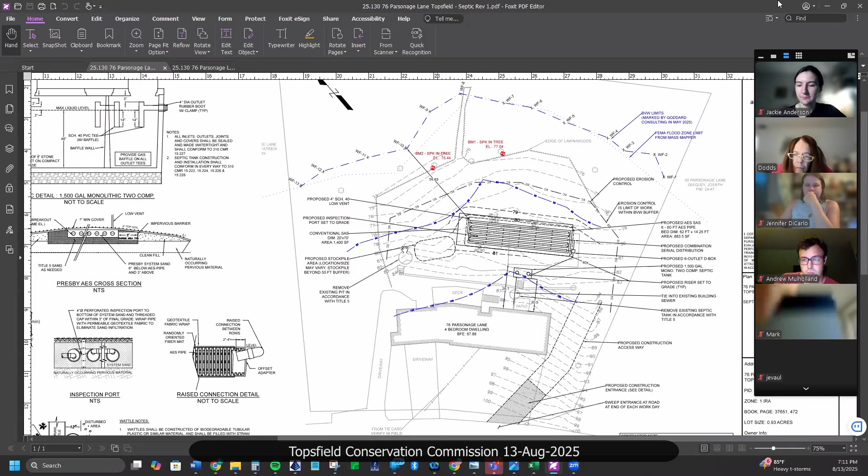All the disturbance happening within the resource area is beyond the 50-foot buffer, with very slight grading touching the 50-foot buffer. But again, it's all within established lawn, and it will be reseeded after the site is stabilized, back to the lawn that gets ripped up from replacing the septic system. We're proposing a construction entrance coming in from the side lot. It's kind of steep terrain coming down here, and we'll have erosion control set around roughly the 45 to 50-foot buffer. Other than that, it's a fairly straightforward septic replacement, happy to take any questions.

Sure, I'm seeing a proposed stockpile area. I remember hearing often that we don't allow stockpiling, but I just noticed that. Yep, so that's just when they're digging up, they have to excavate the soil out, taking out the A and B layers. They have to put the soil somewhere while they put the pipes in for the septic system, so it's a very short-term stockpile. It's not like a true stockpile that sits there for days with vegetation growing.

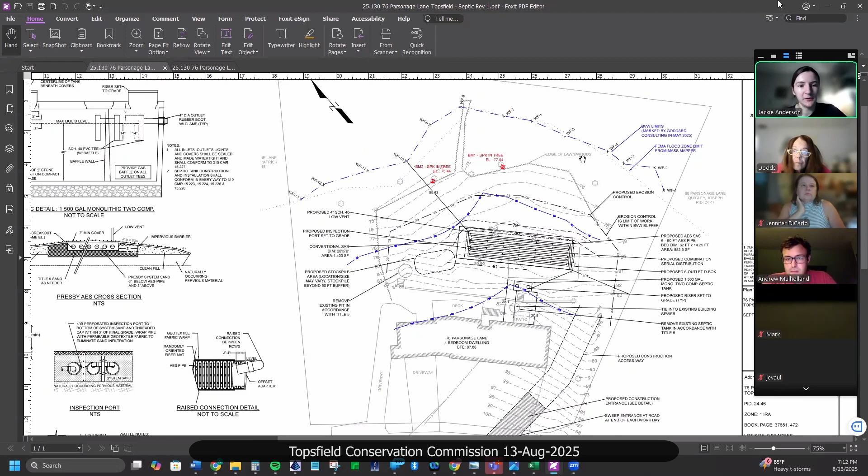Anyone else? I'll also note this plan was recently revised just to correct the numbering of the flags and the drawing of the buffer zone line. I'm comfortable with the way those have been revised. I did review the wetland line and I have no issues with it. I think that's all I had to say about this one.

Just to Andrew's point, oh my God, this lightning is crazy. Just thunder rather. Just to Andrew's... Jen, we lost you.

Jen? Can you hear me? Yeah, now we can. Lost you for a second there. Oh, sorry about that. I think it's this weather affecting my connection. I'm going to turn off my video just to conserve resources.

My point was that in the order of conditions, perhaps we can indicate, to Andrew's point, that the stockpile is temporary and solely for the purpose of the replacement or installation of the new system, and will obviously be removed after.

Sure, I like that. Could you hear that? Okay, that's fine. All right, anything else, anyone? All set with me. All right, I suggest a motion to close the hearing.

I'll put forward a motion to close the hearing with respect to NOI 307-0859 for 76 Parsonage Lane.

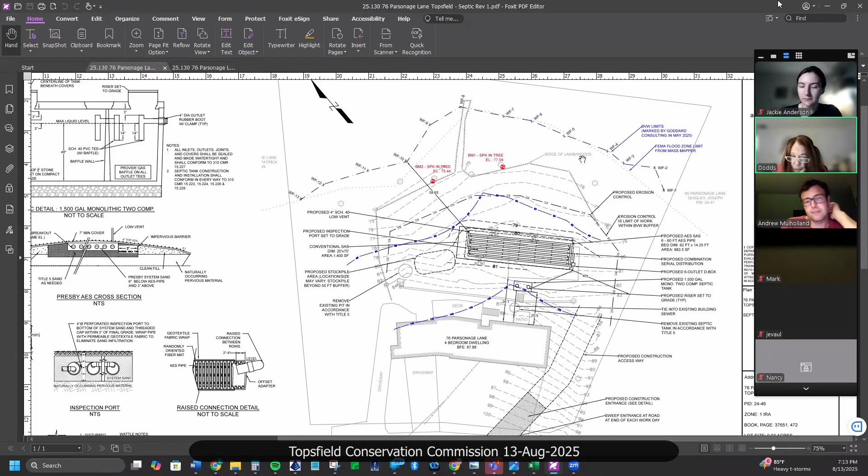This is Jen, I'll second that motion. Okay, and how do we vote? Dodds Shamrock, aye. Jen DiCarlo, aye. Andrew Mulholland, aye. Maureen, thumbs up or down, as Andrew says.

I don't see her at all. I think recently. I see her but I'm not hearing anything. Maybe if you can see her. Okay, I can see a thumbs up from Maureen. Okay, good. All right.

And then we needed a motion to issue orders of conditions. I can put forward a motion to issue an order of conditions for MA DEP file 307-0859 for 76 Parsonage Lane, map 24, lot 46, under the act and the bylaw for the work as proposed and shown on the revised plan dated 8/8/25, with the usual and special conditions, and that it be noted that the proposed stockpiling location is temporary and to be removed as soon as possible, once the backfilling has happened.

This is Jen DiCarlo, I'll second that motion. And how do we all vote? Dodds Shamrock, aye. Jen DiCarlo, aye. Andrew Mulholland, aye. I see a thumbs up from Maureen. Good. Okay, wait a minute, that was the one for order of conditions, right? So we're all set with that? All set. Great.

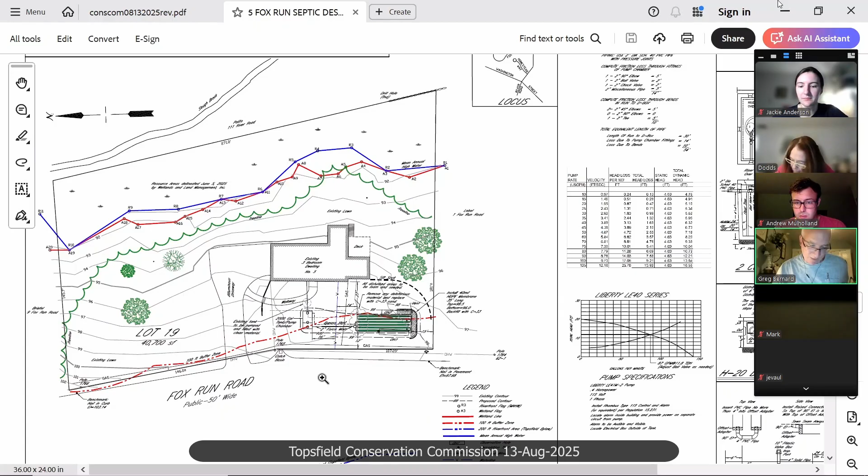He currently has a 3-bedroom dwelling. Streets down at the bottom of the page, and he has a failed septic system which is located in the front yard.

The resource areas were flagged in June. In the rear, off of the property, is Slough Brook. Slough Brook is recognized as a river in the local Topsfield bylaw, but it is not recognized as a river by the state, and it is not recognized by using stream stats.

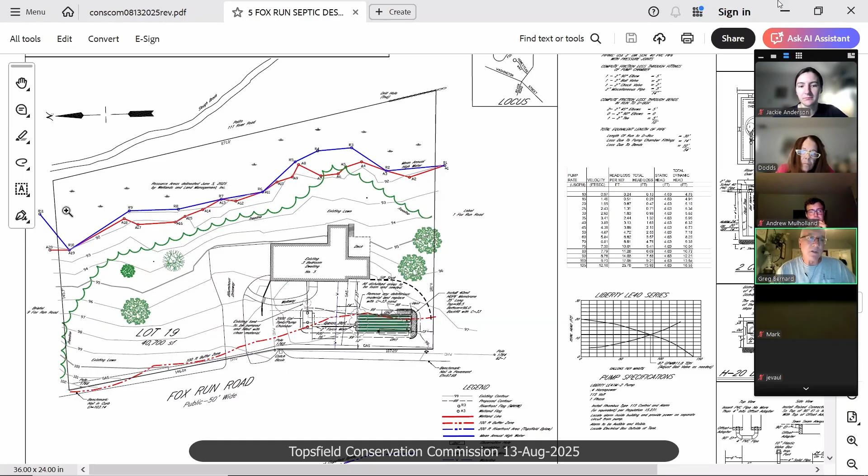Even though this is about the bank of Slough Brook, the mean annual high water is shown in blue. So it extends here. It's pretty wet. They delineated it the beginning of June.

And the BVW is shown in red. In some areas, it's very close to the mean annual high water. It is mostly in the woods or tall shrubs.

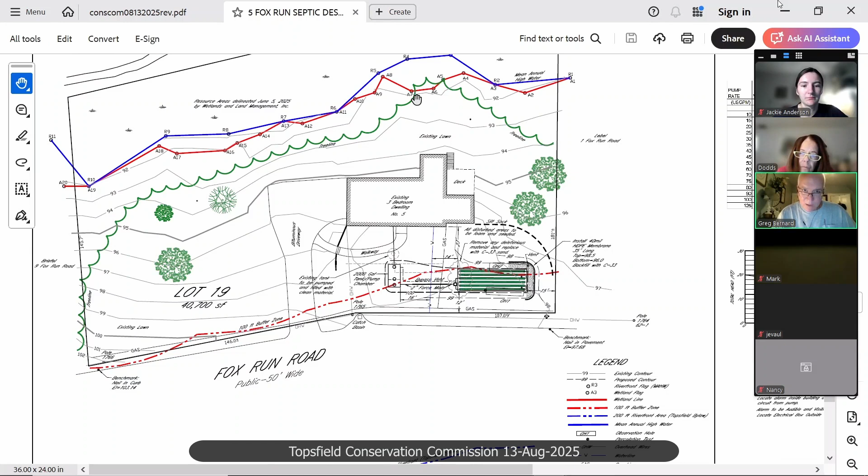The edge of lawn follows this tree line right here. So this is all lawn area with a couple of individual trees. There is a wetland flag that comes out into the lawn, just a small portion right in here, and then the rest is lawn up to here.

We've moved the system as close to the street as we can. We are allowed to be 10 feet from the street, but I'm only going to have it 12 feet from the street because there's a gas line running right down the front of the lot, so I'd like to stay 10 feet off of that in case there's any mismarkings.

The existing tank is right here. That's going to be pumped out and filled, and we're going to replace it with a new larger tank that's also going to house a pump chamber.

There's only a small gradient change because there is a high groundwater issue over here. This is going to be a Presby system too, which allows us somewhat of a reduction of groundwater, but we're still going to have to pump it.

What came up in Alec Jongras's discussion on parsonage was the stockpile area. I don't call it out as a stockpile area, but I do show a silt sock going from the right front corner of the house, which has been staked out, and Jackie and I met out there to review it. This is going to be a temporary stockpile area where you can put the material and then put it back in. That's why I moved the silt sock all the way back here, just to allow him some room to swing his bucket and put his material somewhere.

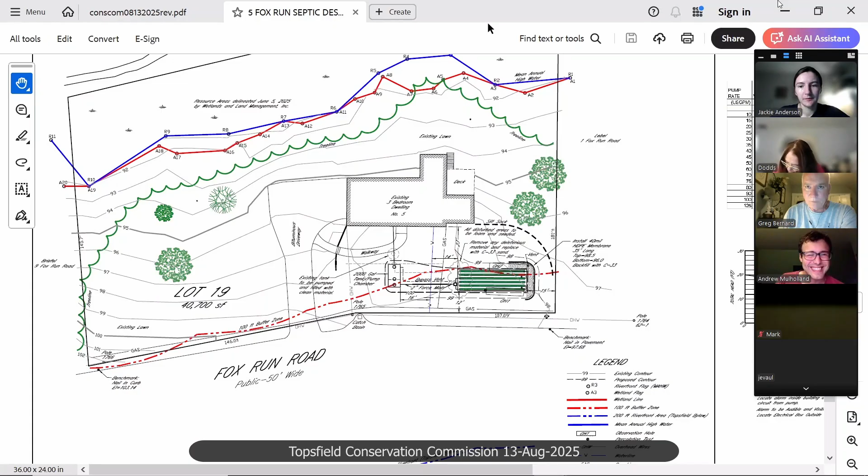All right, okay good. All right, and then next I'll make a motion. Go right ahead, that's all right. I was gonna suggest it, you're on it, I'll go first. I'm trying to move fast in case the power goes out. That's a good point, okay, go for it.

So I will make a motion to issue an order of conditions for Mass DEP file number 307-0860, 5 Fox Run Road, map 47, lot 28, under the act and the bylaw for the work as proposed and shown on the plan dated June 30th, 2025, with the usual and special conditions, noting that the wetland delineation is not confirmed with this order of conditions, and with the further condition that 2 conservation markers be installed as discussed at the hearing.

And before you close, Jen, do you want to add anything about the stockpiling? Oh, sorry, was there... I'm sorry. Well, you had the silt stockpile. Okay, I'm sorry, I didn't. That's okay, don't worry.

I think we're good with the erosion controls as discussed. I will second the motion as stated by Jen DiCarlo. And how do we all vote? Dodds Shamrock, aye. Jen DiCarlo, aye. Andrew Mulholland, aye. And a thumbs up from Maureen.

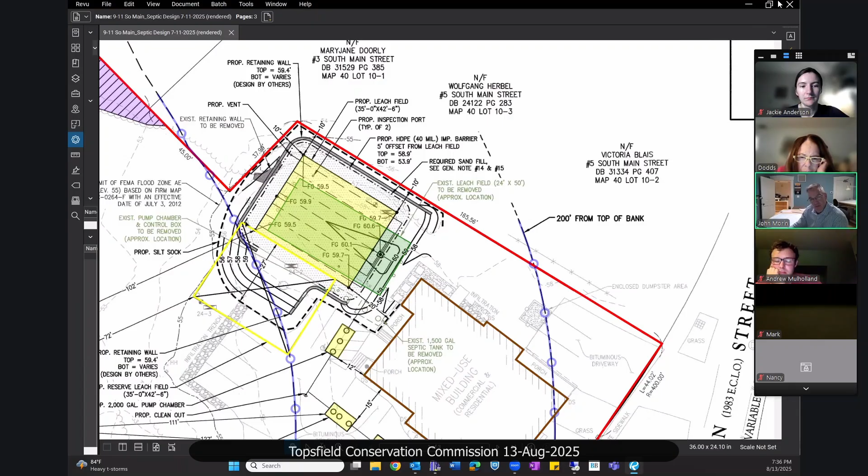We are going to need to install a retaining wall with an impervious barrier in order to meet breakout. We could have graded the northwesterly side of the leach field, but it would have been more work in your buffer zone. Currently, this is all existing lawn.

However, as you're aware, in your bylaw, work within the buffer zone actually requires relief, and under your bylaw, you're supposed to minimize the alteration within the buffer zone to the extent practicable. Since we needed a retaining wall anyway, we decided to just continue the wall, and that would minimize the amount of disturbance in the buffer zone.

So what I'll do now, if there's no questions with regards to what the proposed project is, I'll run through the riverfront calculations.

So this lot was created back in 1974. Because of that, you're allowed to alter up to 5,000 square feet or 10% of the riverfront area on the property. Total lot area on this lot is 42,995 square feet. Total riverfront area on the lot is 41,042, which, as I pointed out earlier, you can see pretty much the entire property is within your jurisdiction.

Based on that 10% threshold, we're allowed to alter 4,100 square feet or 5,000 square feet, whichever is greater. Therefore, the 5,000 square feet is what we'd be allowed to alter. As I previously mentioned, in 2019, we altered 2,160.

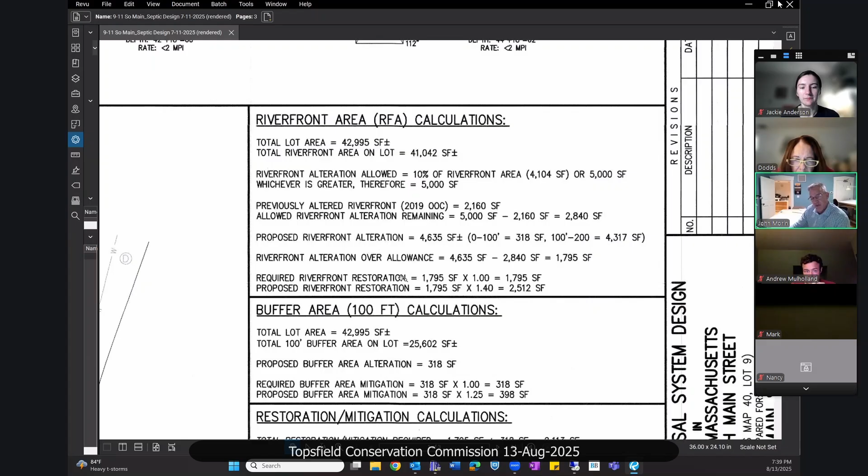So again, based on the previous filing, the riverfront that we are allowed to alter right now is 2,840 square feet, and the overage that we have is 1,795 square feet. Because of that, you need to provide either restoration or mitigation. We're proposing restoration.

Mike DeRosa will get into this in a few minutes, but we had his office go out and do an inventory along the intermittent stream. If you zoom in here, and I know Jackie was out on a site walk with us, you'll see there's a brush line that runs up on the back of the property. All of this is lawn.

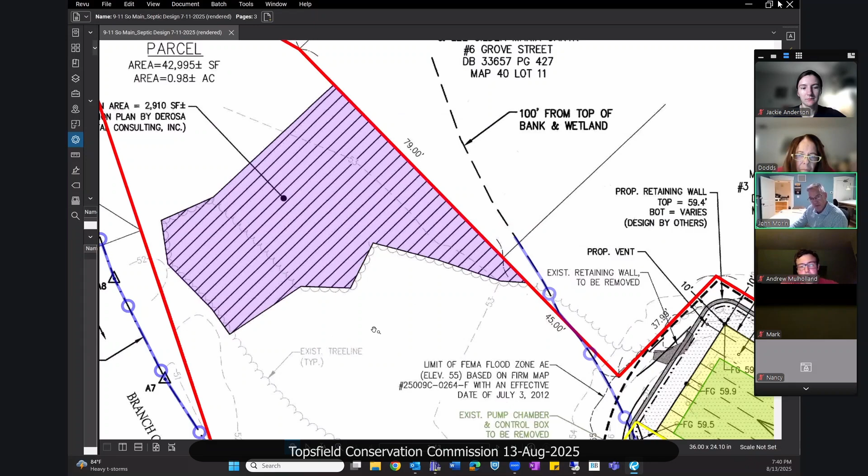So you get a little bit of lawn in here, but all of this is invasives. What Mike is proposing is we're going to remove all these invasives and revegetate, and he'll go over his plan with you. Then we're actually going to restore this lawn back to natural buffer zone. So that gets us the mitigation we need to account for the alteration we're proposing in the riverfront. As I previously mentioned, under your bylaw, any alteration in the 100-foot buffer zone technically requires relief if it's not considered maintenance.

So you'd need a waiver provision. Under your regulations, you are allowed to alter up to 400 square feet - proposed activities in the buffer zone not exceeding a total of an additional 5% or 400 square feet, whichever is less. In this case, it's the 400 square feet. As I had pointed out, the work within the 0 to 100, which is also the 100-foot buffer, is 318 square feet. So we're actually under that 400 square feet, but you're still required to provide mitigation.

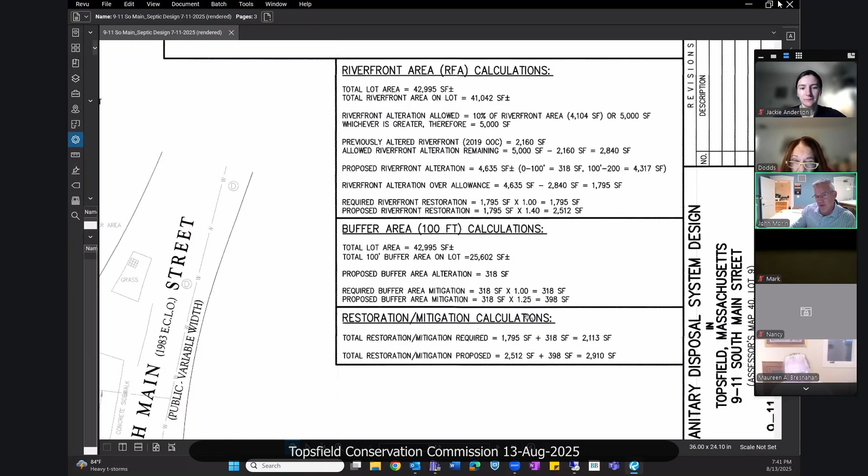So the restoration area that DeRosa Environmental designed actually includes 398 additional square feet to account for the 318 square feet of lawn that we're altering. So this total mitigation area is around 2,900 square feet. Again, all proposed work within your jurisdiction is all within existing lawn, with the exception of the restoration area back here. So we don't see that the proposed work will have any negative impact on the resource areas or the surrounding areas in this neighborhood.

If there's no questions for me at this point, I know I gave you a lot of information. I can have Mike review his work. I'll stop share so he can show his plans, but I don't know if the commission has any questions right now.

So far it sounds very reasonable to me. This may be slightly outside of our jurisdiction to ask, so feel free to not answer, but the intention of the residential space - is it to be used as a single family or as multiple apartments? They're apartments. Okay, all right, thank you. Yeah, there's already apartments in the structure. Okay.

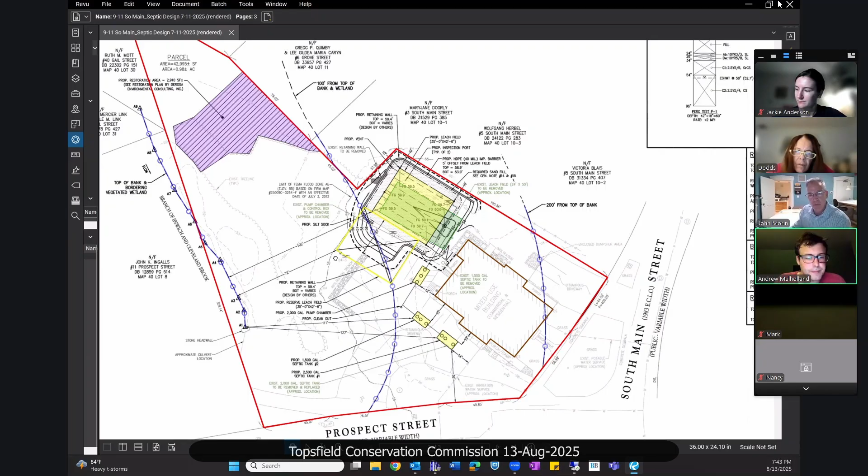Understood, thank you. Okay, if no one else - Mike, are you just going to ask whether it's during the next part of the presentation or now, if there's any photos. Maybe Jackie's going to share some of those photos with respect to the mitigation restoration area, just to get a better sense of it.

Yeah, I can share my screen and go through the conservation plan. Hi, everyone. Mike DeRosa, DeRosa Environmental. Everyone can see that? And you can hear me okay?

The sky is exploding up here in Newbury, it's unbelievable. Same here in Topsfield.

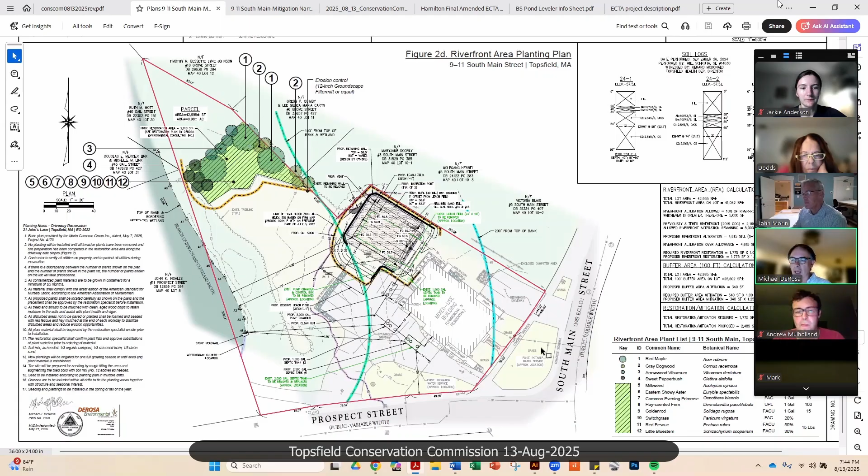So as John was saying, our task on this project was to come up with a mitigation plan for the riverfront area. I'll zoom in. We picked this area in back based on our invasive species inventory. We have all the usual suspects back here - winterberry, sorry, that's a native. We've got multiflora rose, Asiatic bittersweet, and a number of things. And like John said earlier, the brush line shows the limit of lawn.

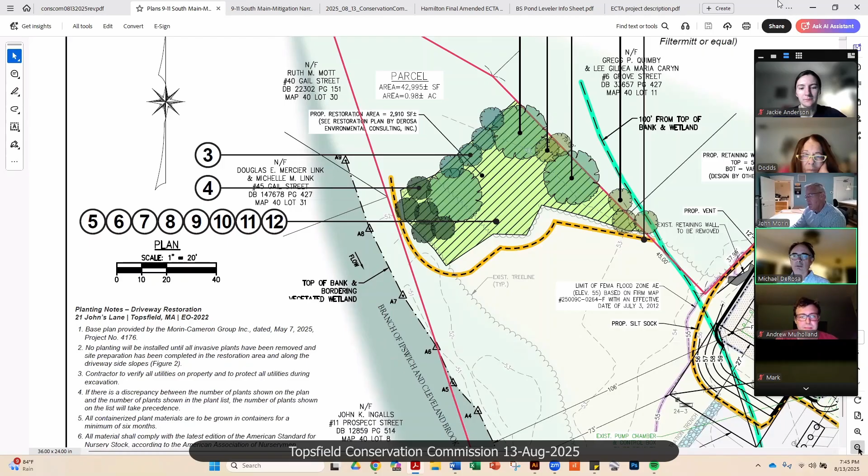So not only are we going to be taking out invasives and putting back natives in some of the occupied spaces, but we're also going to be converting a portion of lawn back here too. So that's a good thing. We're bringing back canopy, shrub, and herbaceous layers, as we always do. We've got red maple for the canopy. We are adjacent to the brook here, and we're up above it, about 4 or 5 feet above the grade of the brook. But it's nice soil, nice sandy soil that you'd expect next to a stream, and all these plants should do well. We have in the shrub layer - let me go to the plant list here.

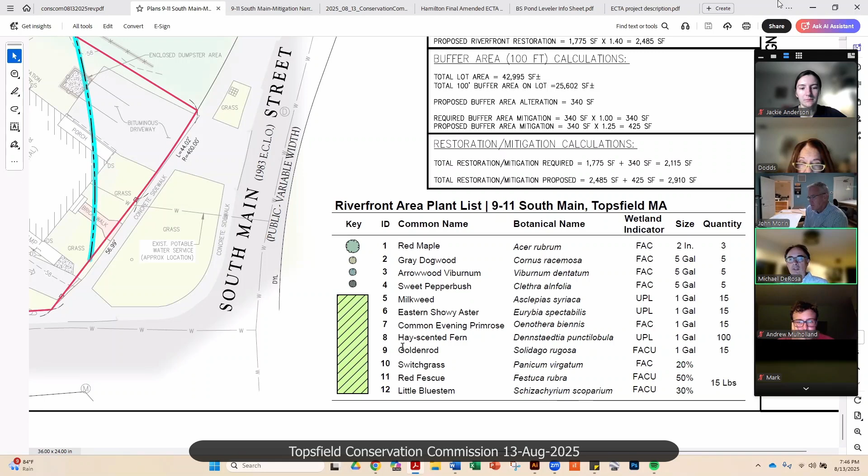We have red maple in the canopy. We've got gray dogwood, arrowwood viburnum, and sweet pepper bush—they're all facultative, so they'll all do well in that area. And then we're going to intermix a whole series of perennial wildflowers, milkweed, showy aster, evening primrose, and then we've got hay-scented fern, upland goldenrod, switchgrass, red fescue, and little bluestem for grasses. So it's a diverse community.

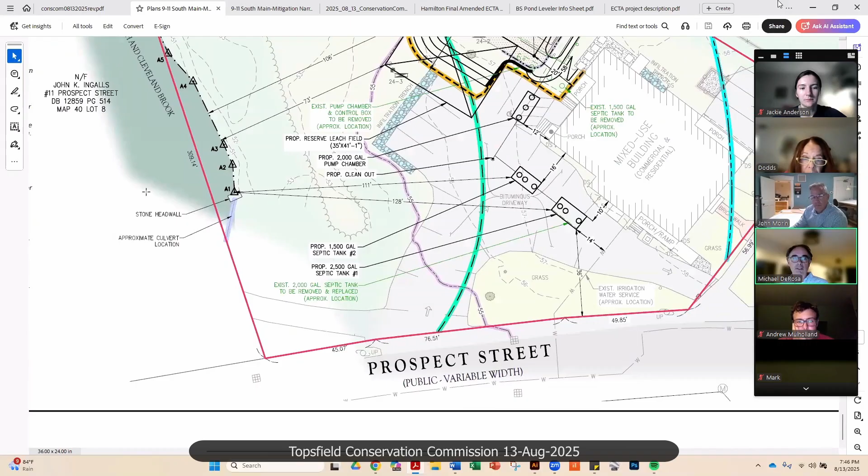It's going to provide a lot of habitat, especially next to the stream, and will meet the requirements of the Wetlands Protection Act and riverfront area by improving the first 100 feet of the riverfront area, which is this green line. So if there's any questions, I can answer those, or give it back to John.

Do I dare tell you my kids went to their pediatrician in that office? Dr. Carpenter was my pediatrician back in the day. Which one? Dr. Carpenter. Sure, Carpenter and the other fellow still lives at Great Hill. That's right. Okay. We're seeing all the changes. Yeah, that's for sure. I didn't dare—I didn't think I wanted to mention it.

From my perspective, this sounds very reasonable. It's mostly an existing lawn and the changes—my understanding is, and restoration area—I think based on the calculations that you showed, make up for it very reasonably. So I think it sounds pretty good to me.

Yeah, I guess my comment, I'm just thinking, is that we may want a conservation marker in front of the new restoration area to make sure that's maintained.

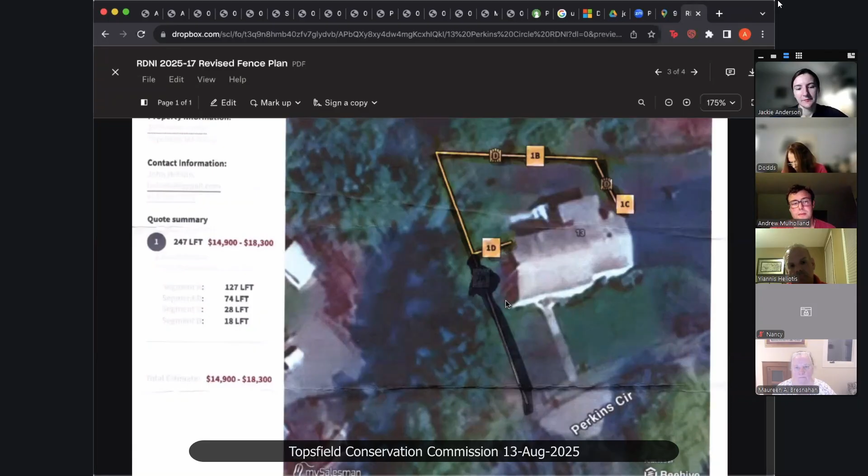But now that part is removed. I don't recall the previous design of the fence, but I agree, Maureen, I think the mesh was sort of making up for gaps in the fence. There were already gaps in the fence, so it probably wasn't a proper fencing choice if you have to compensate with this other mesh, and that seemed to impede quite a bit.

But I also think, because the dogs are going to be enclosed in that area, the whole purpose of this is to keep dogs inside. So we don't necessarily want wildlife going into this enclosed area to be terrorized. Not that your dogs are terrorists, but instinctually wildlife might become prey for those dogs. So as long as we're keeping that front channel open, which it sounds like we are now, I think this is a fine idea.

If you felt that you needed the mesh, or it wasn't going to be enough, I suppose you could come back to us, right, if it's a problem?

No, sorry, the reason we were even discussing a mesh in the beginning - and sorry I missed the first meeting - but for whatever reason, in my mind I thought it would be something that conservation would prefer. But I would prefer whatever kind of fence that's going to keep our dogs safe, right? So I've committed to my family that I'm going to keep them safe for specific reasons.

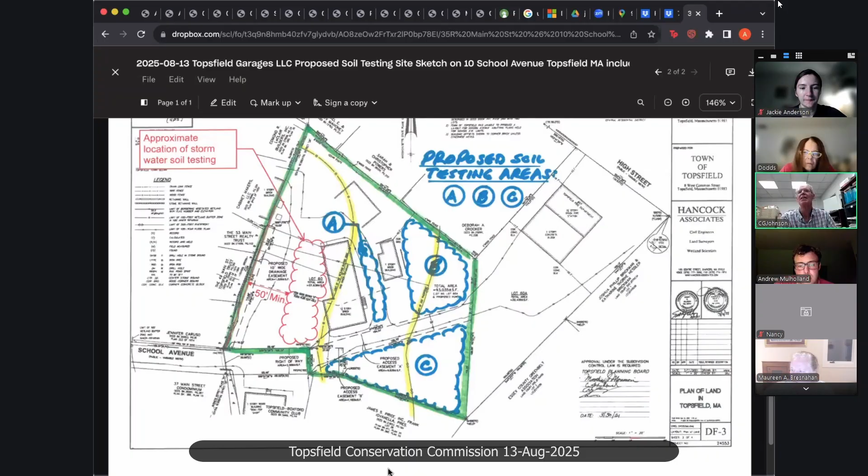Okay, and so then there's a second plan with the proposed soil testing for 35R Main Street.

Is that on the same file? Sorry, I think it's in a different file. Is it in the request itself? I think so, yeah, the request had the old one. Okay, I'll pull it up and someone can direct me.

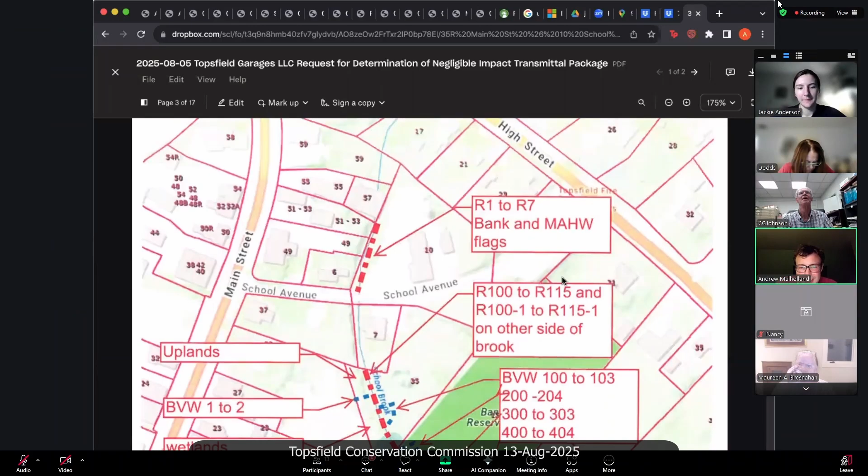Yeah, scroll one more plan down. Yep, so this one has been replaced by the new plan, but this right one there remains the same. I don't know if I can rotate this on Dropbox, so I apologize.

Well, it's very clearly shown here. Even though you don't really have to turn your head 90 degrees, you can see that highlighted in yellow, that first line parallel with School Brook, that's the 100-foot buffer, and then the other is the 200-foot riverfront.

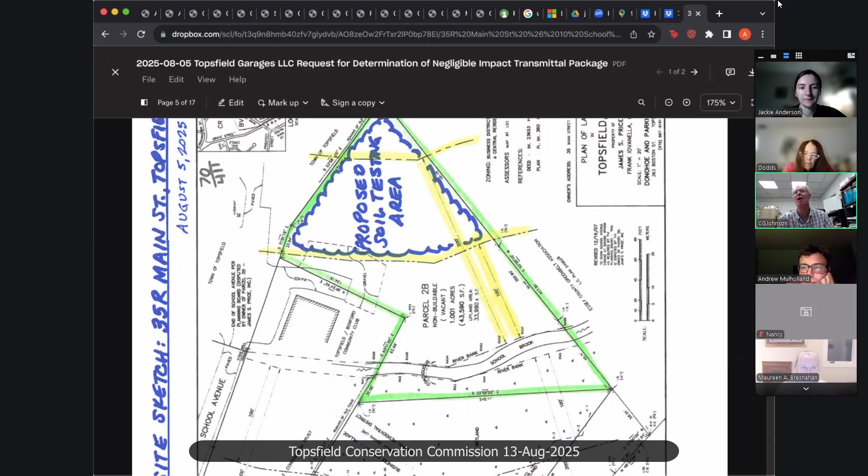And I'll be proposing soil testing, making sure that I don't go past the 100-foot buffer zone with any soil testing. The reason why I know I won't be going past is because Hancock Associates is part of the design team, and their surveyors are taking care of the topography. I have flagged 54 trees which are 5 inches in diameter or larger, and Hancock Associates is providing their existing conditions topography with all the different trees shown, so I'll know where I am and make sure I stay outside of the 100-foot buffer zone.

Wow. I also attached photos in the Dropbox folder if anyone wants to see how that area looks currently.

So I'm seeing this, I think that's area A on 10 School Ave. That's looking towards area B, which is behind the building. Not very visible, but it's back there, partly out of the buffer riverfront. And then this is 35R Main Street, looking in a few different directions. I had a few different photos. So that area is undeveloped.

And if I'm correct, right here is the box top shop. Is that? Yeah, that's what I was wondering, Andrew. Okay, thanks for asking, very good. Okay, yep, and then I've got this. Happy to bring any files back up that anyone wants to see in more detail, but I think in general it sounds straightforward to me, in terms of the work as proposed.

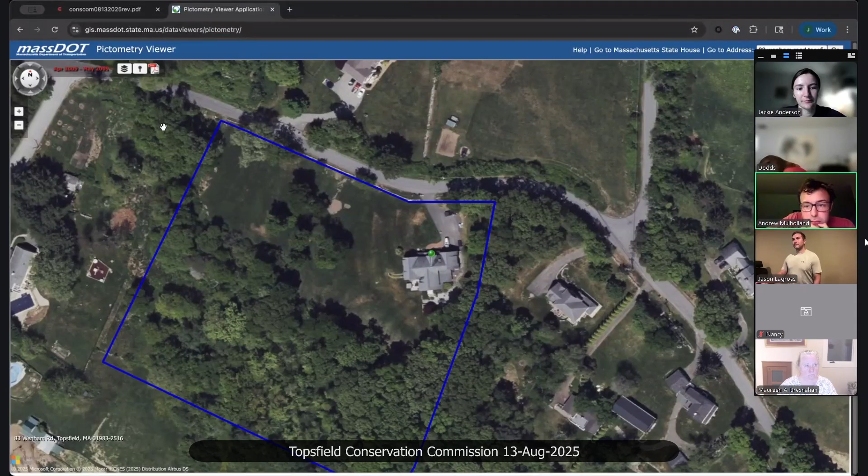Oh, someone has it up. I was able to pull it up quickly. So this is from 2009. These are the trees that we removed as part of the last work - they were all dead and rotted out, unfortunately. So this is when the previous owners owned the house and the lawn. This is where we're discussing. Area one is right here on the corner of the property, so we're not adding any additional lawn.

Okay. I can go back further too if you guys would like. No, no, no, yeah, I'll let the other commissioners.

I was just gonna say I drive by this site relatively often, and in the past couple days I'm not sure exactly when the work was done, but I did see some of the disturbance occurring, and my concern - I mean, obviously I want erosion control, I'm not saying that, but the limit of work goes into this brush, so would the erosion controls just have to expand as the team worked? Like every couple hours they expand that out, or they say alright, we're going to do another 5 feet in, let's move the hay bales out 5 feet, because it is relatively dense brush and that little stream.

So just in terms of the mechanics of that, and then in terms of the removal of the plants, you're going to have bare soil. Do you have any - I know you're not going to necessarily plant grass back there, but do you have any plans on what might be able to be reseeded there? You might have heard on this - I'm not sure if we mentioned upland mixes of things, and there are different native seed mixes that can be reseeded in an area that, while you wouldn't necessarily be able to mow it, would look a lot more tidy than the stuff there.

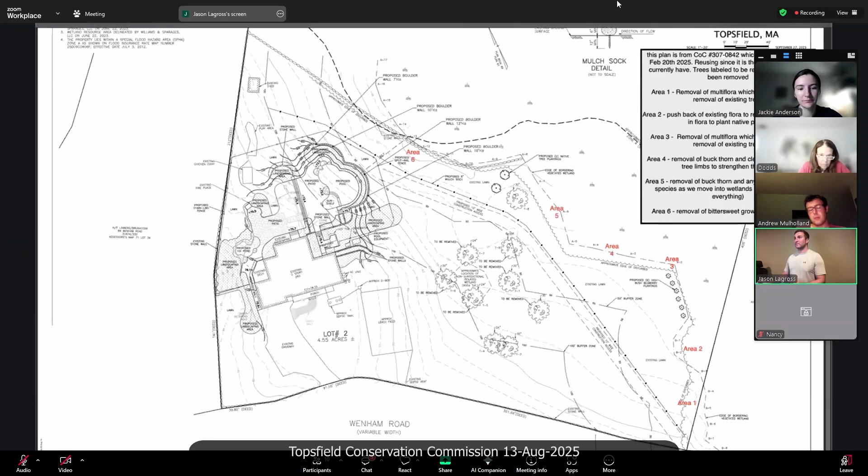I can pull this up, if this helps. In the top right here, I do mention what the goal for each area was. Like I mentioned, the only thing that wasn't included, and I just missed it, was the two overhanging tree limbs on area 6.

So if we were to issue a determination of negligible impact, Jackie, we could condition that, as you noted in our meeting notes, concerning sedimentation and hand removal. What about disposal of the invasives once things are cut away? That's a good point, we should condition it to properly dispose of all invasive material. We certainly don't want to be spreading invasive seeds. With knotweed specifically, if there's any of that, you don't want to spread it because it can regrow from almost anything, so you just want to throw it in the trash and get rid of it.

And then the trees, you just let the top go? Yeah, the vines and the trees, it's best to cut them before they have the berries, I think that's in the fall. If it's the bittersweet vines, you just let them die off. But if you cut any out that are removable that have berries on them, you want to bag those and throw them away. If they don't have berries or seeds yet, they won't spread, so those can just be composted. It sort of depends on the plant, and knotweed is the main one where you really have to throw everything away.

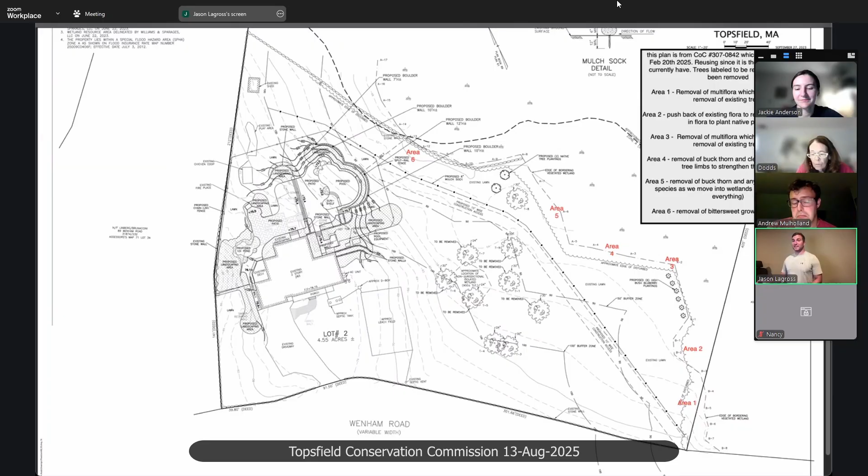Well, I guess, Jackie, it seems to me like there has to be some pre-activity meeting on site to specifically identify these invasives for the uninitiated on this, if there's no wetland scientist or arborist involved, so that nothing that is not invasive gets removed, or very minimal.

Well, I wouldn't agree that would be the case where he's already dug it up. That wouldn't count. And if the other stuff is by hand, I can't imagine he'd be incorrect by doing vines.

No, I mean the vines you cut them with a machete or an axe. No, like, my concern is removing things that are not invasive. That was my concern. And so, does he understand what's invasive, what's not invasive, since there isn't a wetland scientist or an arborist or some other expert involved?

And so maybe that can be mitigated by having, not to volunteer Jackie, but to have Jackie go on site before activity. I guess we could condition it that it needs to be removed by someone able to identify invasive plants, and that I would do a pre-activity meeting to confirm that.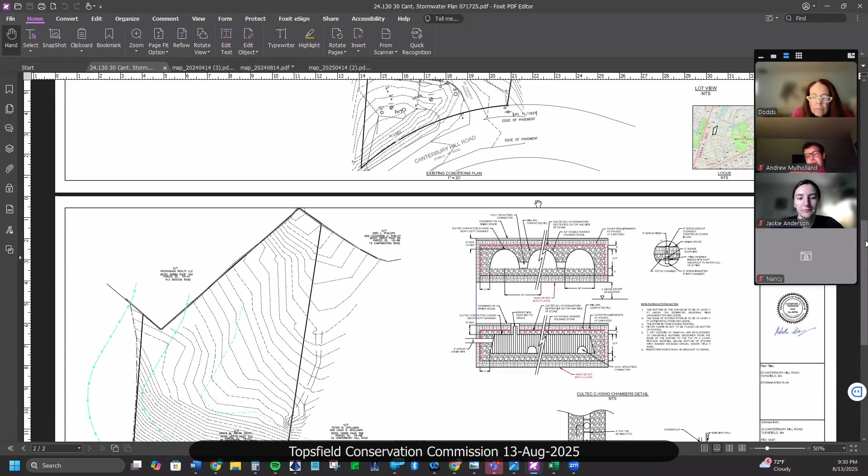So we got re-involved in the project and we had it surveyed. This is showing the new wall that was proposed. In doing my analysis for the stormwater mitigation, you tackle the increase to follow the regulations in Topsfield. We found that the wall that's already been built sneaks into the buffer zone a little bit.

I'm going to zoom in a little bit for you guys here. So as you can see, the retaining wall is right around here going straight. And it's about 830-ish square feet, plus or minus, that is within the buffer zone.

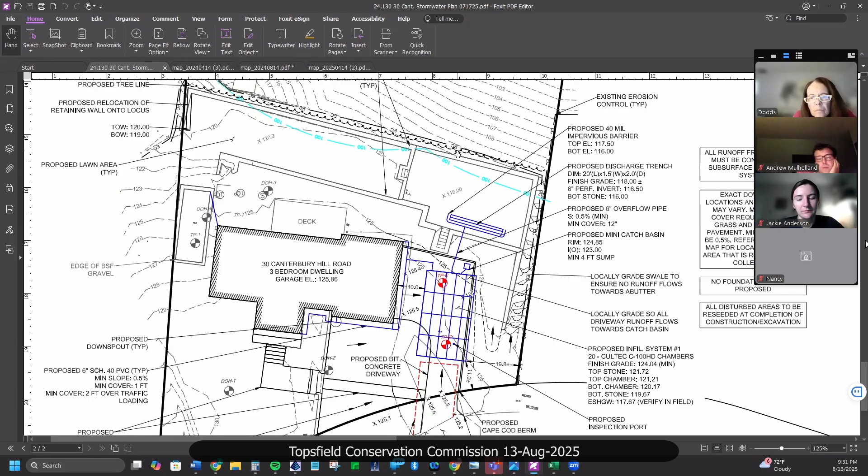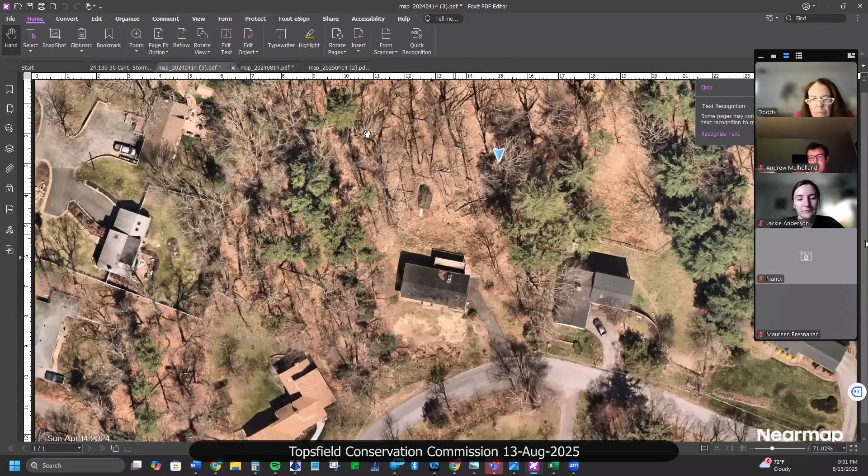And the existing area, so I didn't perform the existing survey, but you can show you the edge of lawn is what the surveyor called the edge of lawn. Whether it was trees or vegetated, it's kind of difficult to tell. I have some images, this is back in '24. And this is a green image in '24 as well, August. And then this is showing the conditions now.

I'm gonna go back to the plan, and then the homeowner's here to answer any other questions, because I wasn't involved in the project until a few months ago when he got told to prepare a stormwater submittal for the planning board, and now we're here.

Yeah, I guess I'll note that I found out about this because of the stormwater submittal to planning board, which I normally take a look at those, and it's clearly in the buffer zone. So I sent a violation notice asking the applicant to cease and desist from further activity, although it seems like the activity is pretty much complete, and then also attend this meeting to discuss the next steps with us.

And just thinking about what we would have allowed here in terms of whether they could file an after the fact permit or whether they need to remove it completely. We can issue an enforcement order asking for it to either be removed or permits secured for it. But considering our regulations under our local bylaw, the criteria for allowable buffer zone alteration, this project would not meet our criteria because the work was not within existing lawn.

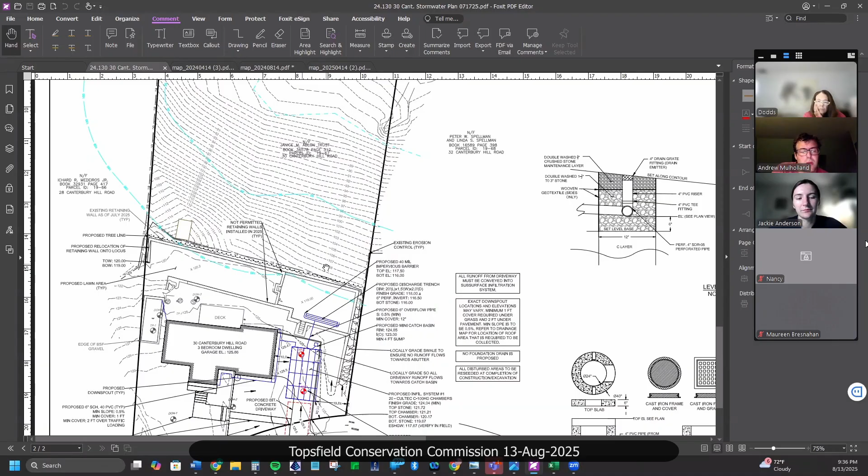Not all of the wall is in the buffer, right? I'm looking at the plan, it looks like the blue line is the buffer. So a good chunk of it is, most of it, except when you get to that left side. Okay, do we have any photos to give us a sense of what happened here?

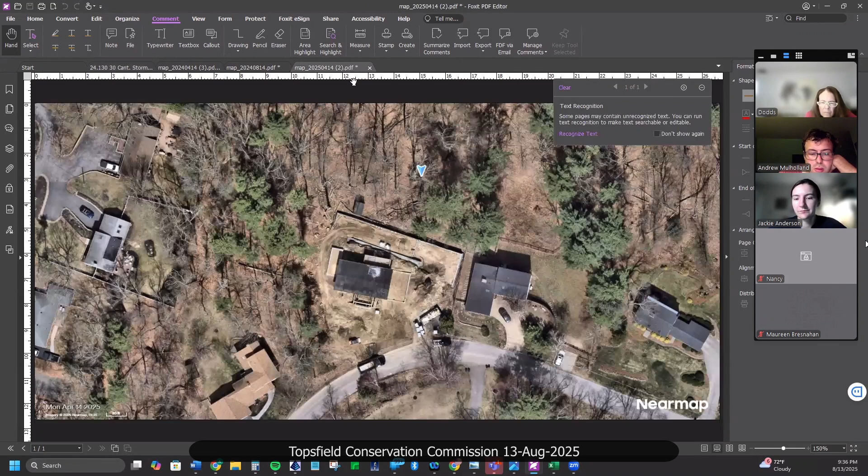Is there any—I don't have anything like this, my schedule kind of got rushed, so I didn't get to go on site and get more detailed photos. Florian, do you have any photos you'd be able to share? I do have photos, but hello, my name is Florian, homeowner of 30 Canterbury Hill Road. I don't have any photos at the moment to share with you right away, but this is basically what we're looking at, what it stands at now.

There's a shed behind there which I did not touch, and before the shed, I built the wall. Do you know what the height of the retaining wall is, or does it vary? Right now it's 6 feet at 120, so it varies—around 117 here, so 3 foot, then it gets a little bit shallower here, so I think the max height is around 6 feet, but he can confirm that.

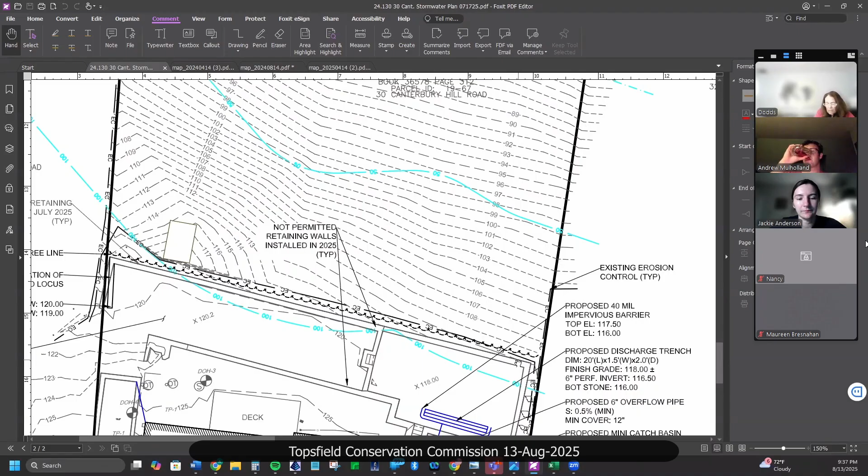So you mentioned it's a planning board issue now, is it currently before the planning board? Yes, exactly. So the reason you guys are here, we're in front of you now, is because we just submitted to the planning board, since it's a certain amount of square footage of disturbance at a certain percent slope, he was required to essentially follow the Mass Stormwater bylaw, which is showing this big Cultec system that we're proposing now. Since we had to do this submittal, I had to get it resurveyed, and as we showed the resurvey, the wall was within your buffer zone, and that's why we're in front of you guys now as well.

I'm sorry, is it site plan approval or what's the permitting process? You guys have a stormwater permit application—it's like if you disturb over 4,000 square feet of area, you're required to file a stormwater permit with the planning board. Because this house is existing, it's not a new house, it's just being rehabbed, but your local bylaws require, I think 4,000 square feet at the top of my head, and then you have to go in front of the planning board for a stormwater permit application.

So it's after the fact with them as well, obviously. Correct, correct. And what is the outcome? Is it just a decision that comes from them that says yay or nay on the application?

Essentially, yeah. I know Jerry's not here anymore, he used to review them in house, but they sent him to a different engineer now. And as long as the stormwater meets their regulations, is that... I forget the lady's name, the planning board lady at your town.

She said, yeah, she says typically, as soon as the engineer says yay, it follows your regulations. The planning board typically votes yay according to her, but we haven't been in front of them yet.

Yeah, okay. So I imagine the planning board may want to see what Conservation Commission decides. I think we want to see what they're going to decide first. It's not to play that game, right? So we might have to run these hearings waiting for each other's feedback before we both rule on it.

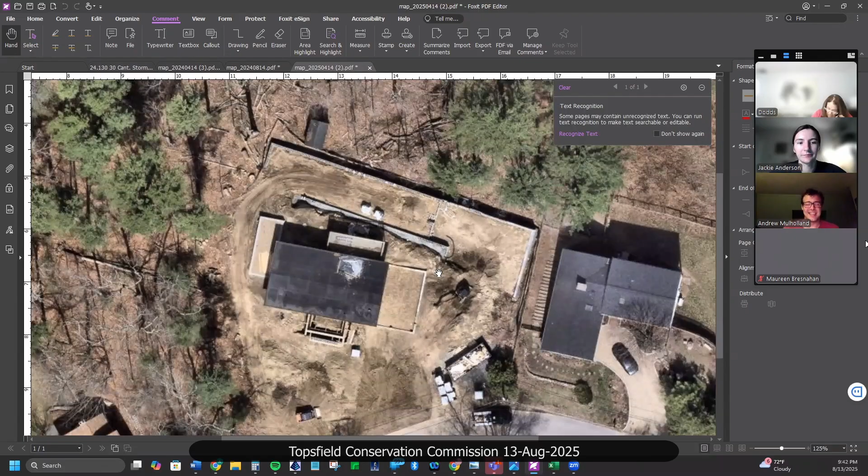Sorry for all my questions. No, I'm just like, got questions too. Sorry. Like, what's on... so is this what it looks like now, or is there... this ground?

This is like a couple of months ago, April 14th, 2025. Okay, I mean it's funny because the wall's not even, it's not even parallel with the house, it runs at an angle. Yeah, like they didn't put it in straight, at least with respect to the house.

So that's just an observation. The buffer zone runs at an angle too, so I can see that maybe an attempt was made to keep it out of the buffer zone, but it was off by 10 feet.

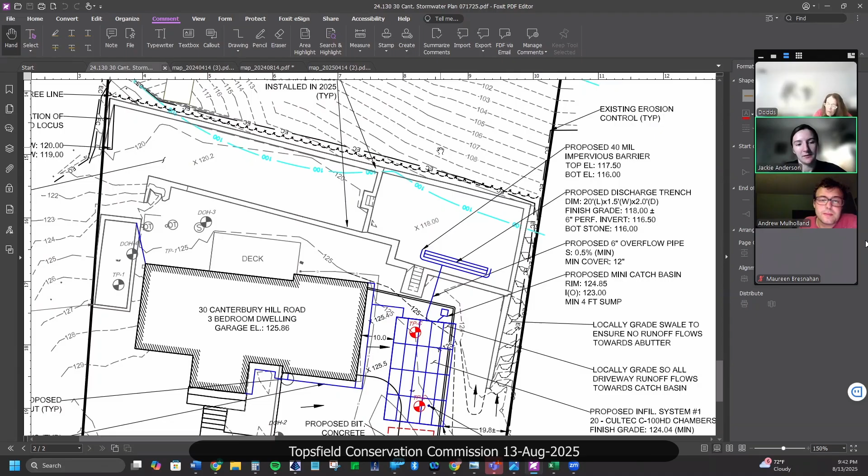Well, that's a good point, because if an attempt was made... quick question - when was the buffer zone or the wetlands last delineated? Are we talking about riverfront here?

This was delineated - we had one engineer, and then it was reviewed again by Goddard Consulting last year. Let me double check, but it's very recent. My question is, we're discussing matters of what, 3 or 4 feet here?

And it's very steep too. It's not linear - it's obviously a big slope, so if you pulled a tape measure it'd be a lot more. But we're not doing that with the offsets. It's probably about 10-ish feet. I can get you that exact number after.

That's fine. My question was, what level of uncertainty are we dealing with - if this was a 5-10-year-old delineation, or a fairly recent one?

I'm wondering if we even approved this delineation. We probably didn't if they didn't file for anything. Let me pull that up right now - it might be an unapproved delineation, but I don't know. Let me pull that plan up and I can get you that file.

We can look into that again, because what I'm showing in the plan right now is strictly based on - I wasn't intending that the buffer zone was going to be encroached like that for the planning board, and I just got the enforcement letter notified last week. So I don't have all my details with me right now, unfortunately, but I can certainly get those and look back at the file for you.

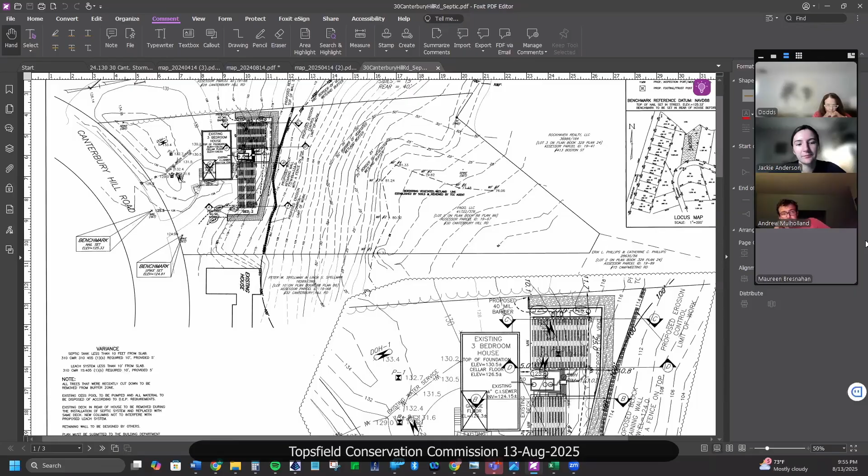Are there flags on the site? There should be flags, because this was delineated not too long ago by TCC. I think it was 2024. So I'm sure there should be flags there. But we don't know - yeah, I agree. There has to be some more fact finding to figure out really where we're at.

And this is fairly dramatic. I mean, it's a big wall put in. The grading has changed, and it sounds like it might impact stormwater. So I think we want to do this right. We need to be on site to see if the soil is completely contained inside of the wall, and not spilling out. Because what if this is not in the buffer zone and we're going to issue an enforcement order? It just seems odd to me.

Maybe. I see your point. I see the plan, though, as sort of an admission that it is within the buffer zone. I think, unless in the unlikely scenario that I go review the wetland delineation and determine that it was overly conservative in determining where the wetland is - but that never really happens. I would... no, that's a good point.

But let me ask you this, though. The lot - can we go back to that plan? I still think you need to be on site. I agree. Yes, I would like to go on site.

So this plan is taking another engineer's delineation, right, and putting it on this plan - is it an as-built plan? It's half as-built, half proposed, because it's after the fact. And so is this your plan? You signed off on this plan?

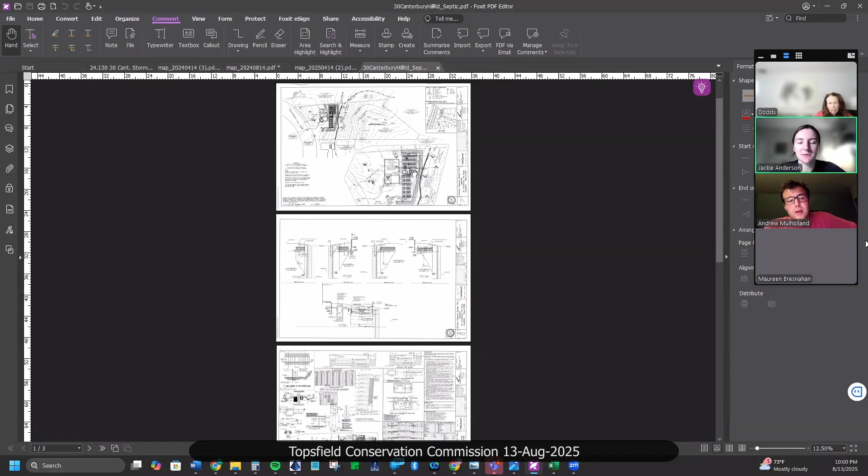Sorry, Jack, I mean it sounds like that's a really easy thing—that would be super easy for the engineer to know. Like that's part of the file, it got verified, they came before us, we approved the line. It doesn't sound like that's what happened here.

Yeah, I thought there was a note that Heidi had reviewed it, or the agent had reviewed it or something like that on one of those plans. I get it, because I think Heidi was very excited when we went the BSF route, because the BSF route was completely no wall, and I think we'll find out tomorrow—whatever we can look in the file and see if it was ever approved, because there was an approved plan for the Board of Health that never got put in. But Heidi could look at something and go, yeah, you're way out of the jurisdiction, and so you're fine.

Looking at this, within reason you're way beyond it. Not to belabor this, but let me ask you, Jackie, can we vacate the order if it turns out it's not in our jurisdiction?

I think the order only applies to work affecting our jurisdiction. We could even specify that, but that might be part of the default language. So if we issue it and it turns out it's not in our jurisdiction, then it's not applicable anymore.

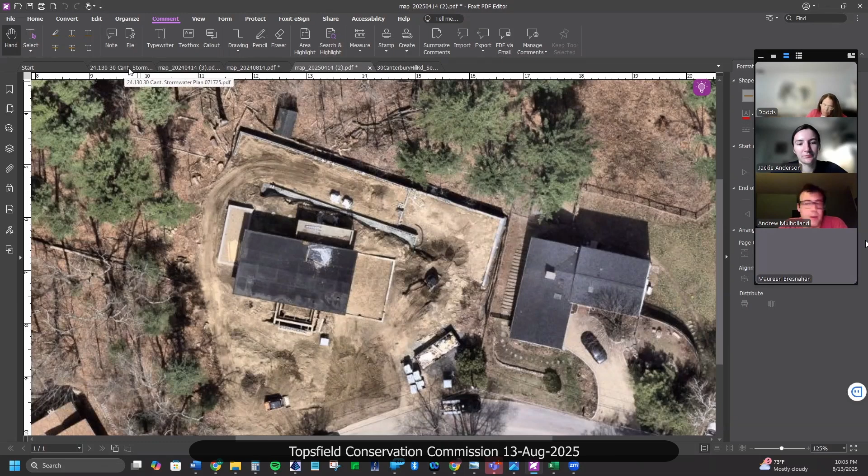So it's put the sedimentation and erosion control in, and what else? Do a delineation, meet on site, confirm that the wetlands flags are up to the conservation administrator's standards right now. Whether Heidi approved them within the past 3 years, check, done. That can happen tomorrow morning.

Okay, I don't know, that's just me speaking, I didn't mean that like. Yeah, no, that's my opinion. Does anybody else have anything? I agree, I think Jackie's got to go take a look at it, and I think the homeowner's more than willing to have her do so. I'm okay with that. Great, so I think that's good.

We're going to review it, and then should we go forward with filing the NOI, try it for the next meeting, just in terms of, we want you to follow up with Jackie after she reviews the site. I think we should probably go forward trying to file the NOI to keep the process moving, or we're going to try to come back here the next meeting and have the enforcement order issued.

I think it's up to you and the applicant to decide what you want to do here, because ultimately, assuming we confirm there's disturbance within the buffer zone that was not permitted, it'll either need to be removed and restored or permission secured. It's up to you if you want to take that risk of applying for the notice of intent, knowing it could be denied at the commission's discretion based on our regulations.

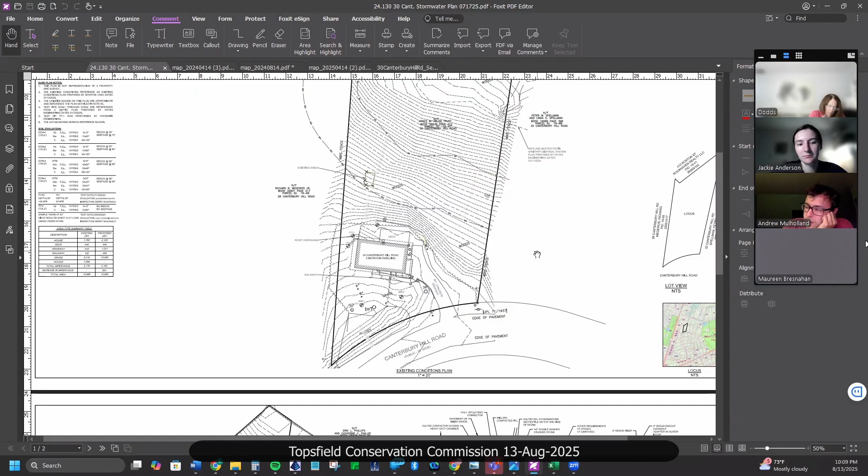Increase or benefit the resource areas and their values. So just things to think about, because I know this is a work in progress and you're looking for direction, and we want to give you some of that, but this is an extraordinary situation if it is within the buffer zone, and it is extraordinary relief that's being sought. So you've got to come back with all of those things lined up.

Yeah, for sure, that's the goal. Like I said, this is from last Wednesday, so we're just here to show our face, and we couldn't come up with that in a week. Understood, understood. All right, do you want me to do a motion? Yeah, definitely. All right, good luck. So, with that, hang on one.

So I'm gonna do my best here, so I will make a motion. This is Jennifer DiCarlo, I'm gonna make a motion to issue an enforcement order for 30 Canterbury Hill Road. That requires the owner and or their agent to meet with the conservation agent on site, or permit her access to the site so she can inspect it, and for the owner and or their agent to confirm the relevant resource area boundary.

And I think also to install or implement sedimentation and erosion controls on site with respect to any disturbed soil. I don't know, I think that's it at this moment in time. Does anybody else have anything that I missed? No, I would just potentially clarify that the sedimentation and erosion control is up to the conservation administrator's discretion.